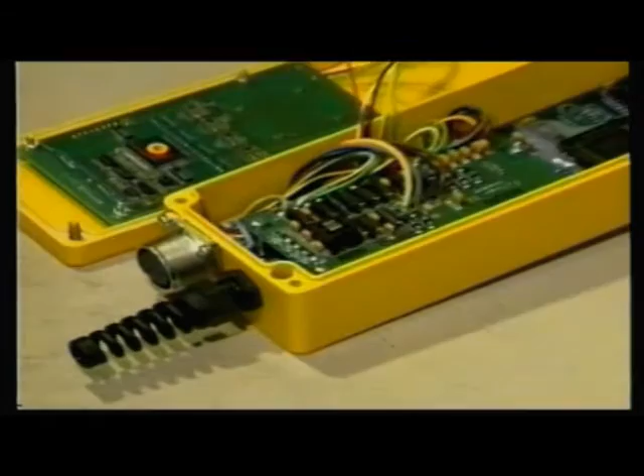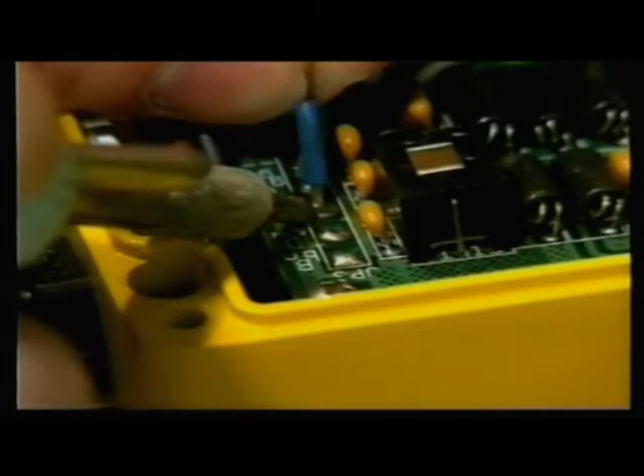Moba is a modern, innovative company with about 70 employees. Together with the subsidiaries in Dresden and Italy, Moba is a company offering high-performance mobile control, measuring and logistic systems.

The main activity of the company is directed to the following areas: machinery controls, weighing systems, ident systems, system software.

A competent customer advisor service has resulted in the development of intelligent products which are ideally suited to the market. This leads to a considerable increase in efficiency of the end product. Worldwide representation ensures optimal local support of our customers.

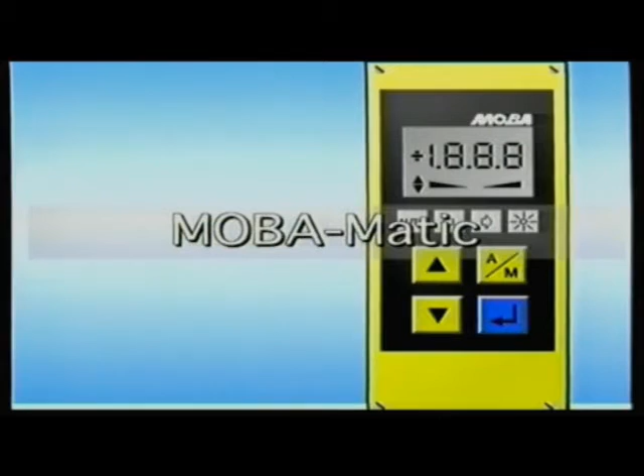In 1994, a revolutionary system for the leveling of the screed was developed, the Moba Matic. Due to its accuracy and its simple operation, the system became a great success within one year. Four different types of sensors are available for equipping the road paver.

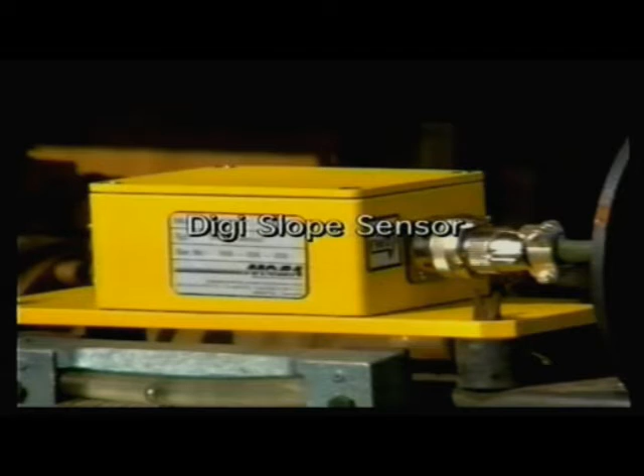The DigiSlope sensor for slope control. The DigiSlope sensor is equipped with an LSTA sensor unit, especially developed for the road paver. It enables slope control for even very wide screeds and was conceived in addition for high compaction screeds. Because of its reliability, the LSTA sensor unit has been used for the last 20 years in the well-known S276A slope controller, a proven technique.

The sonic ski sensor. For all applications, the sonic ski sensor employs contactless, ultrasonic techniques. The use of six ultrasonic sensors enables a sensing range of 25 centimeters above the string line. For ground sensing, the sonic ski calculates an average value and can therefore smooth out irregularities of curbs or gutters.

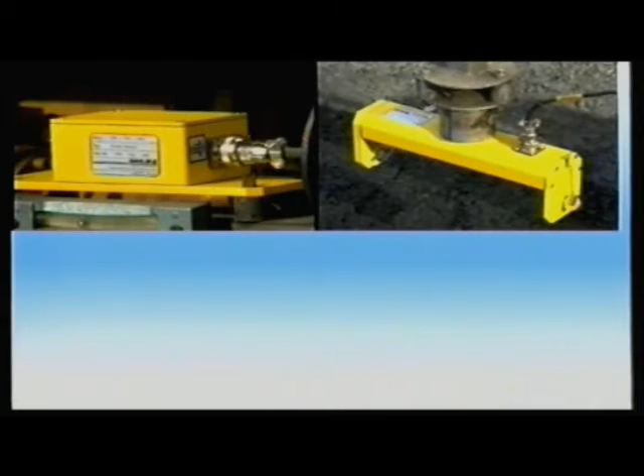The Digi-Rotary sensor for grade control. If the use of an ultrasonic sensor is not possible, the Digi-Rotary sensor is a good value for money alternative. The Digi-Rotary sensor works with the same principle as the proven grade controller G176B. As accessories, a sensing arm, a sensing tube, and a sensing ski are all supplied with the Digi-Rotary sensor.

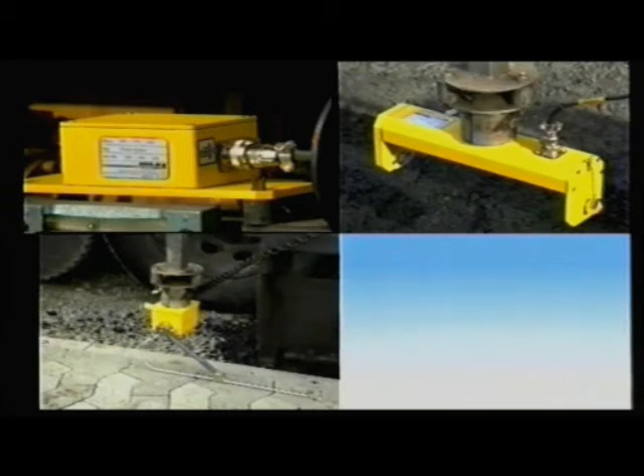The LT360 laser receiver for grade sensing. The LT360 is used everywhere where a rotating laser transmitter is employed as a reference. Laser transmitters are preferred for the constructions of airports and car parks.

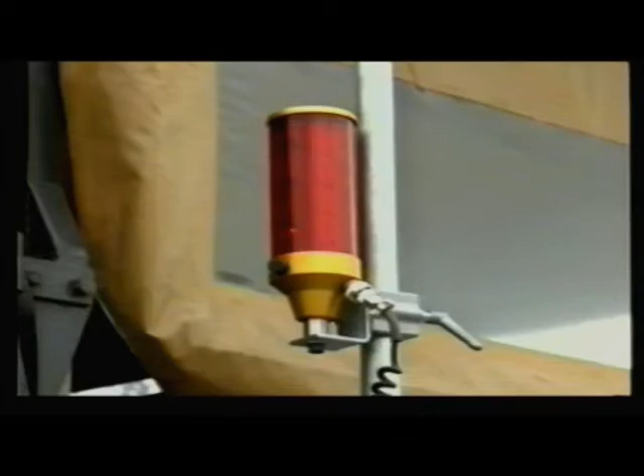The digital controller recognizes the sensor which is connected and is immediately ready for operation. The operation of the various sensors differs only very slightly and causes no problem to the user. The Moba Matic: for every application, the right sensor.

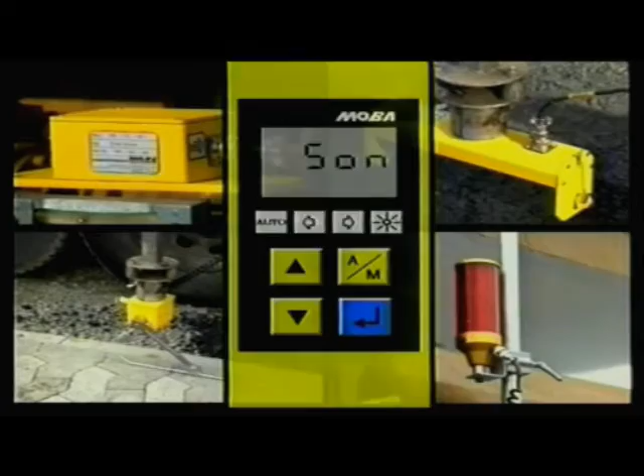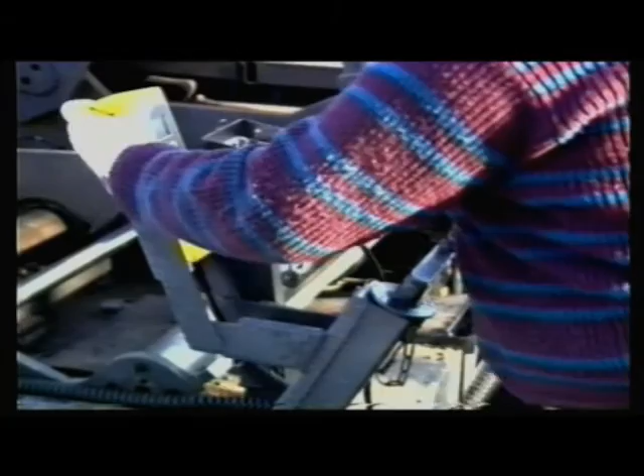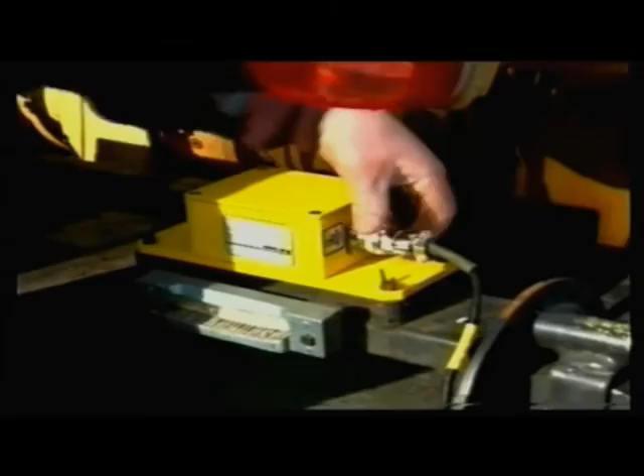The standard system is installed on the paver in a few easy steps. The digital controller is fitted into the standard holder. The cable of the digital controller is plugged into the machine connector. The Digi-Slope sensor is fitted into the standard holder and connected to the digital controller with a spiraled cable.

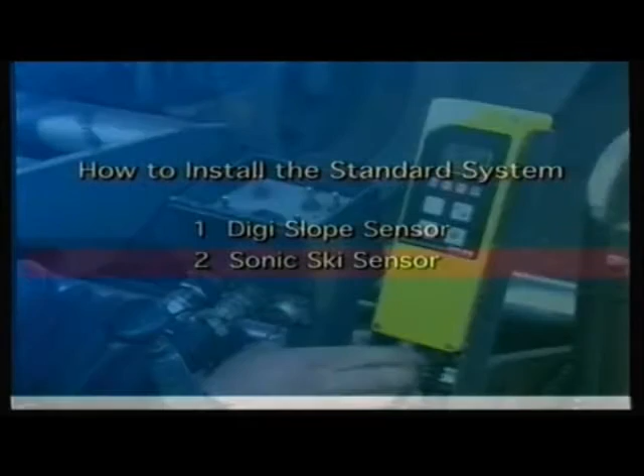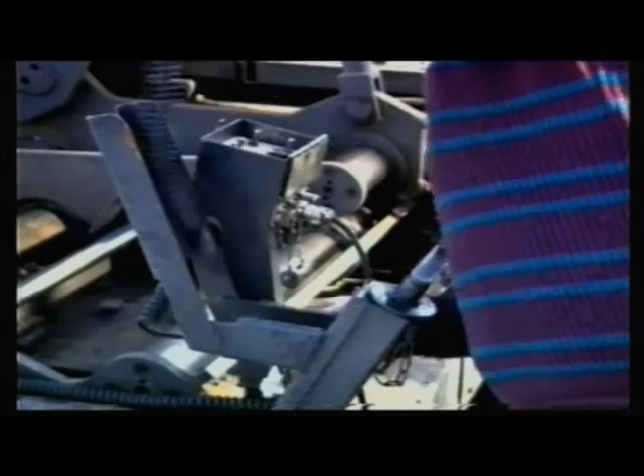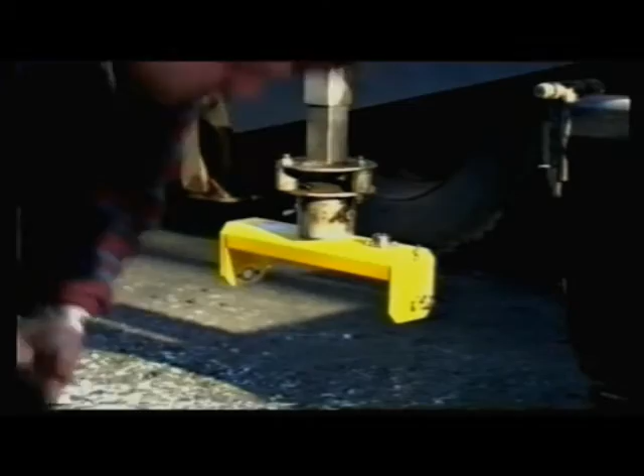To fit the sonic ski, the same procedure is followed. First, the controller is fitted into the holder. Now, as with the Digi-Slope sensor, the cable of the digital controller is connected into the machine connector. The ski is fitted into the standard holder and connected to the controller. Finished.

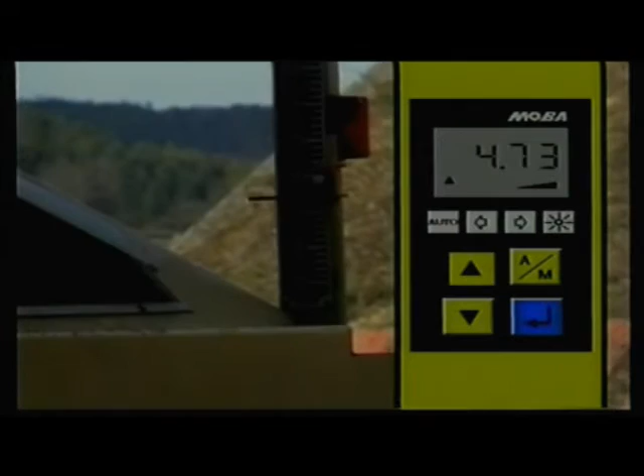If the sensor has been fitted for the first time, or if a sensor has been changed, the new sensor must be acknowledged by pressing any one of the keys. With the up or down key of the controller, the tow point is brought to the start position. To set the set point to be the same as the existing actual value, press the return key. The display shows the actual value again.

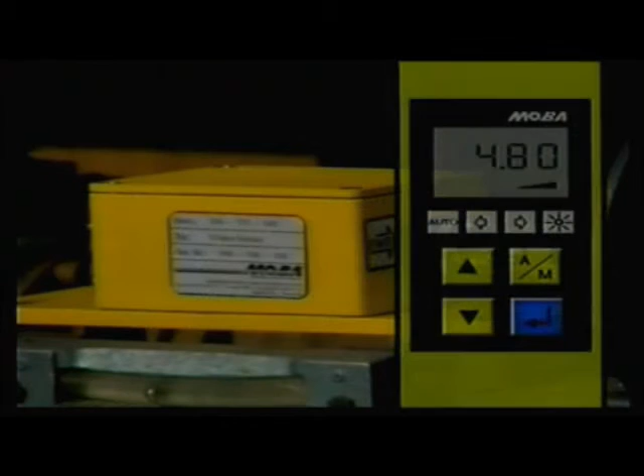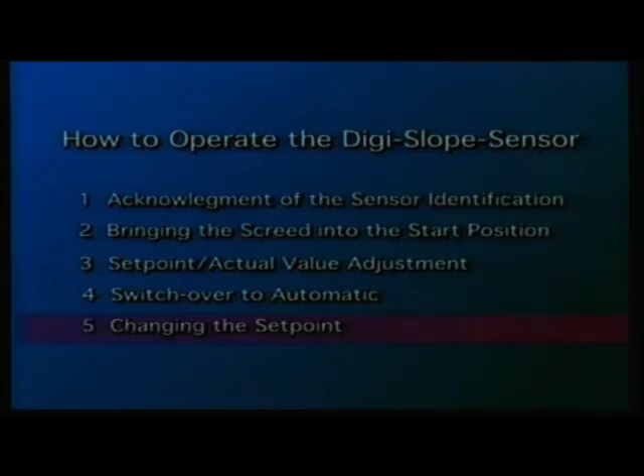By pressing the AM, or automatic manual key, the automatic control mechanism is activated. The controller now controls to the set point displayed. During operation, the set point can be changed by pressing the up or down keys. The controller immediately controls the actual value to the new set point.

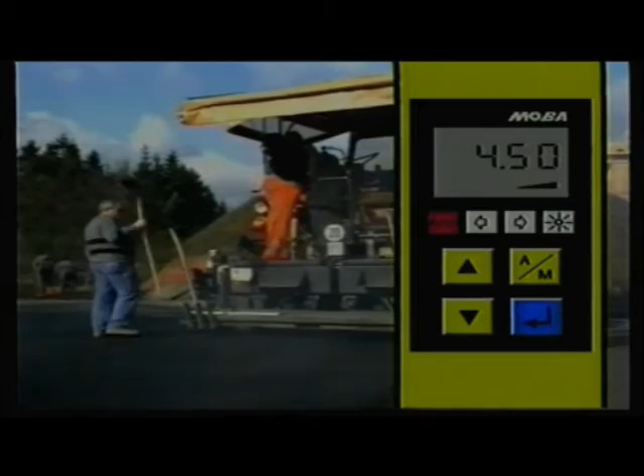If the sensor has been fitted for the first time, or if a sensor has been changed, the new sensor must be acknowledged by pressing any one of the keys. By simultaneously pressing both the up and down keys, the string line mode can be activated or deactivated. This example shows sensing of a string line. The illuminated string line lamp is a confirmation of the selection made. The tow points can be set to the start position by pressing the up or down keys of the controller.

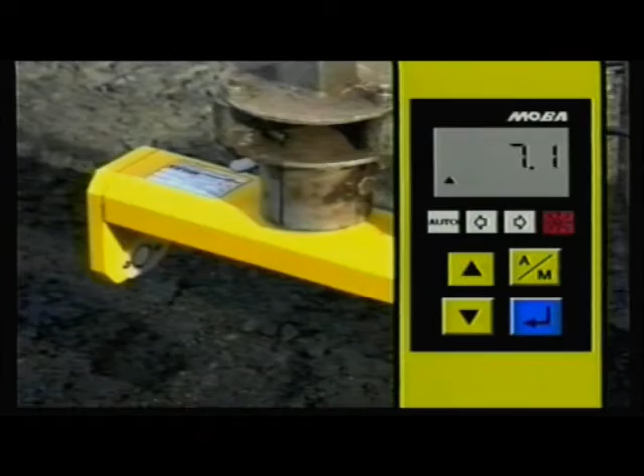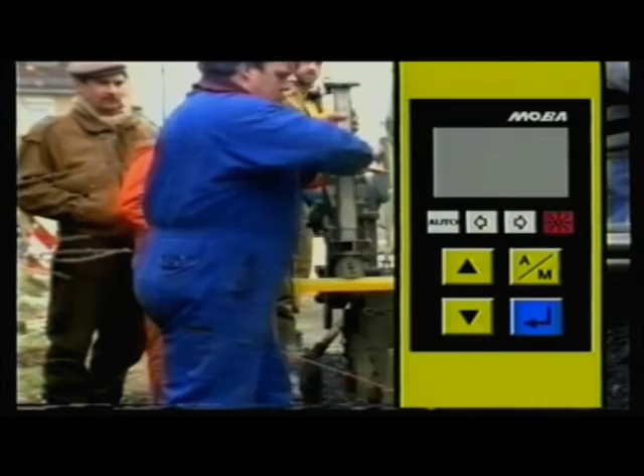For stringline sensing, the ski must be positioned at a height of about 350 mm crosswise above the string line. This is signified when the actual value display no longer flashes.

By pressing the return key after positioning the sonic ski, the actual value and set point are set to 0.

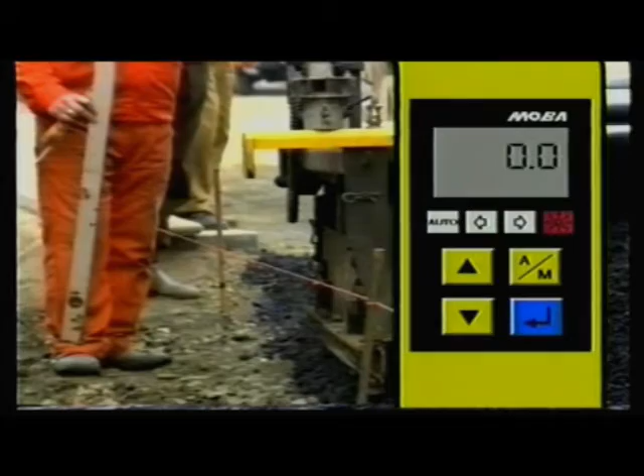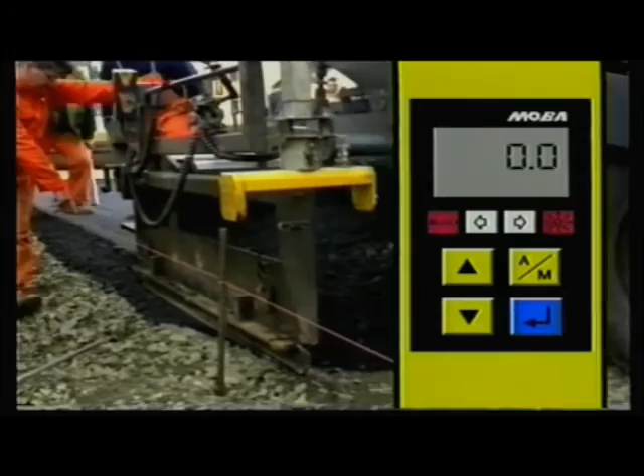After pressing the A/M key, the controller works automatically. The set distance between the sonic ski and the sensed reference is kept constant. During operation, the set point can be changed to the required value by pressing the up or down keys. The sonic ski immediately controls to the new distance set.

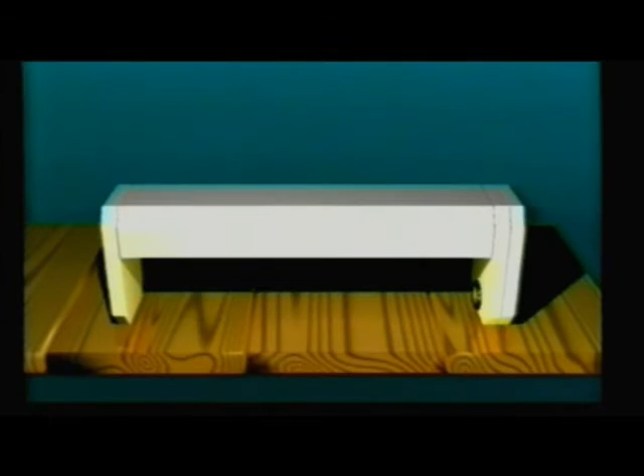Now it only needs to fit into the standard holder and work together with a digital controller. Add a nice color, and finished. Now that's what an ideal sensor should look like.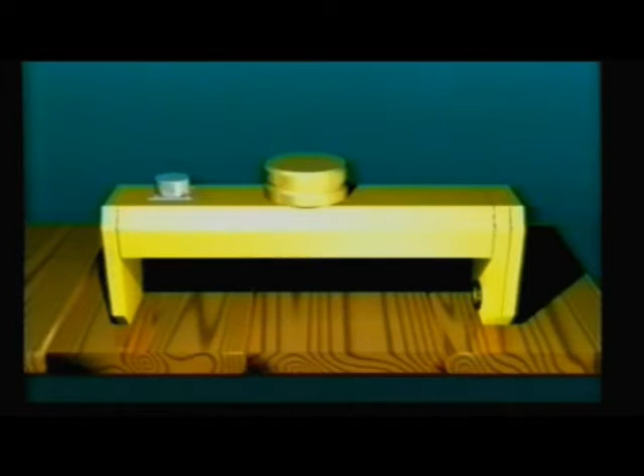How is distance actually measured with ultrasonics? It's simple. You need a sensor that can send and receive ultrasonic waves, a reference surface, and a stopwatch. The sensor sends the sonic waves in the direction of the reference surface and starts the stopwatch. The sensor is then switched over to receive. The sonic waves reflected back cause the stopwatch to stop when they are received.

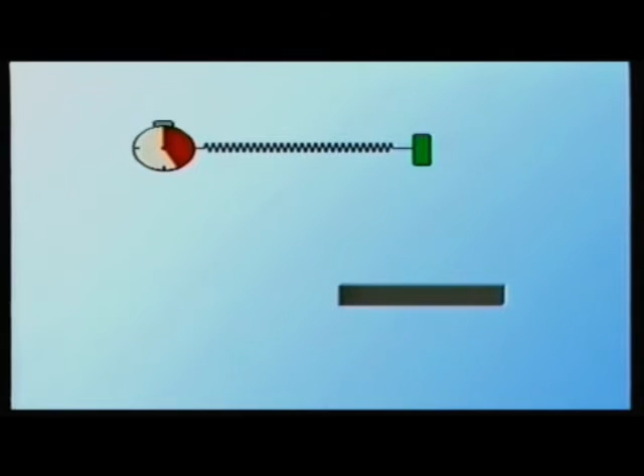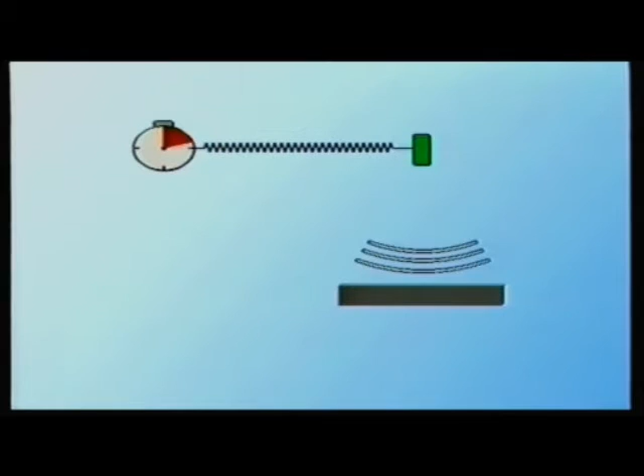Once again in slow motion. The sensor transmits sonic waves, and at the same time the clock is started. The sensor switches over to receive. The sonic waves are reflected, received by the sensor, and stop the clock. Because the speed of sonic waves is known, the time measured can be used to determine the distance between the sensor and the reference surface.

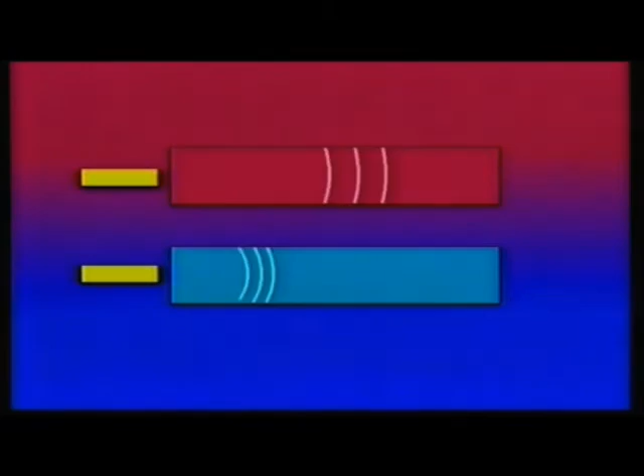But unfortunately, it's not quite that simple. Sonic waves do not always travel at the same speed. Their speed is dependent on air temperature. Sonic waves travel faster in warm air than in cold air.

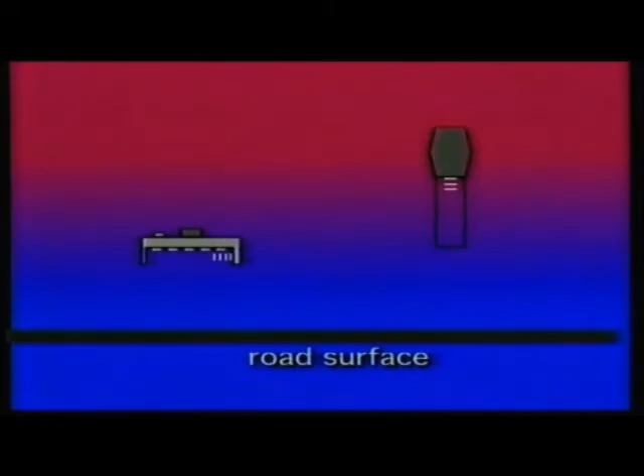By making a reference measurement in which the distance is known, a sonic speed reference can be established. Here, it must be noted that the reference measurement determines the air temperature of its own reference distance, not the temperatures outside this range. The greater the distance measured, the larger the measuring error is. For a distance twice as long, the measuring error will be twice as large.

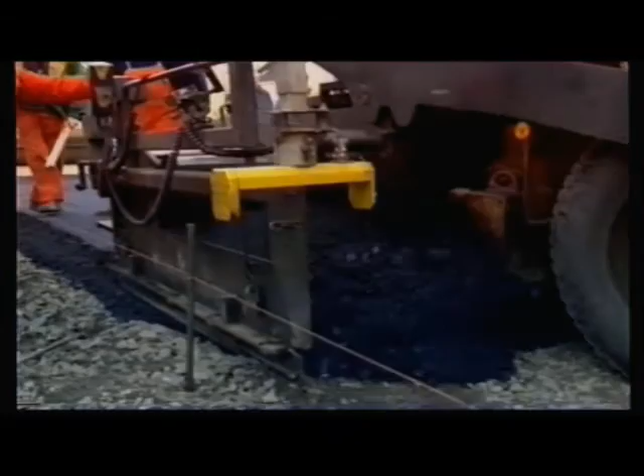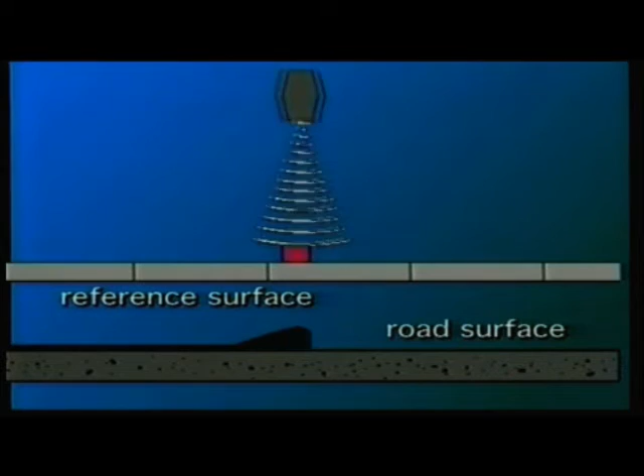And concerning errors, what happens when, during stringline sensing, the ultrasonic sensor does not detect the stringline, or when ground sensing, large stones hinder measuring? To eliminate such errors, Moba has integrated a control window for the sonic ski which, as standard, is set to plus or minus 3 centimeters. This value can of course be altered according to circumstances.

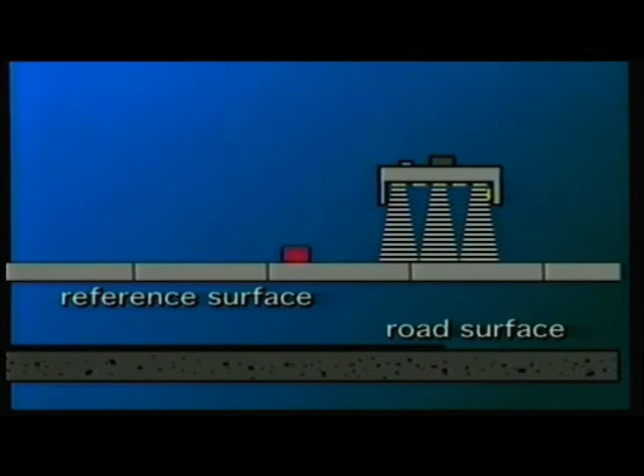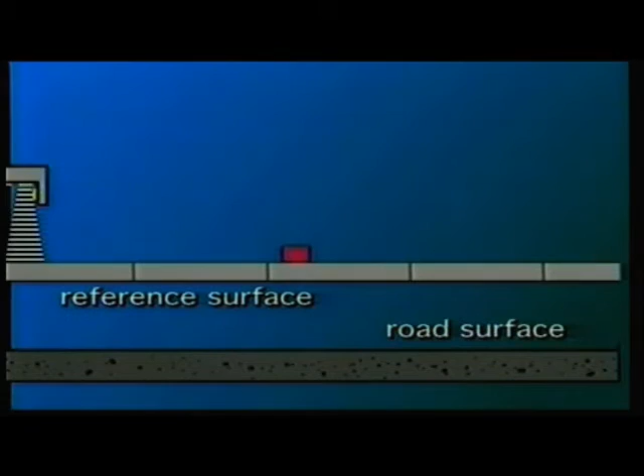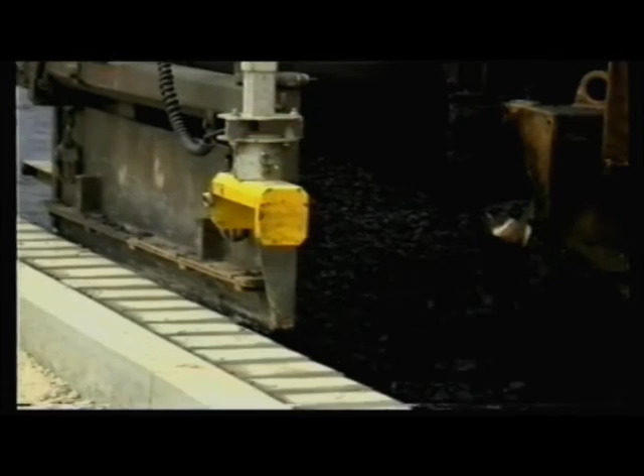The control window works as follows. Obstructions which are larger than the control window are ignored, and the controller stores the last value. If the control window has been set too small, there may be complications with large changes of reference, for example on steep slopes. The control window itself is not designed to compensate for irregularities of the reference.

This is done automatically by the sonic ski taking an average value. Systems that work with only one ultrasonic sensor light up an area of about 25 centimeters. The reflected sonic waves first detected are taken as a true measurement of the distance. Unevenness of the reference is simply copied without correction.

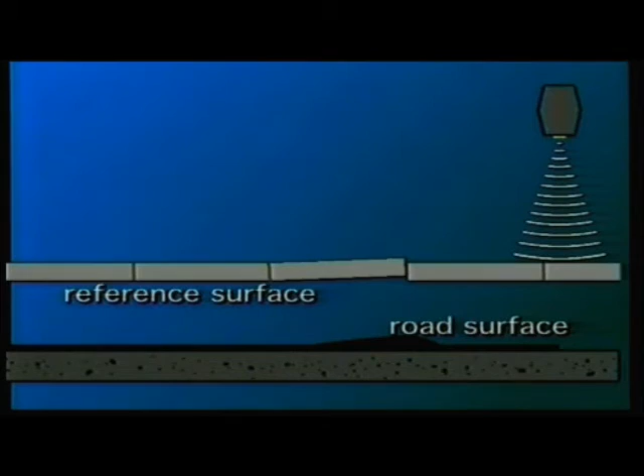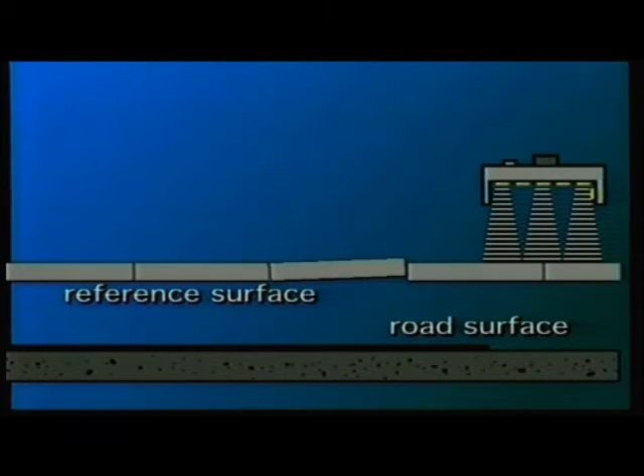For ground sensing, the sonic ski works with 3 ultrasonic sensors. From the resulting 3 independent measurements, an average value is constantly taken. In this way, irregularities in the course of the curb or the gutter are compensated for. Not quite - when detecting with a magnifying glass, one can detect small errors, but the ski is still 3 times more efficient than a single sensor.

Ultrasonic waves spread out in the same way as a cone of light. Sensors which work with only one ultrasonic sensor must be positioned about 60 centimeters from the string line. Only then, and very inaccurately, can a sensing width of 25 centimeters be achieved. It's not always possible for the driver of the paver to keep the 1-unit sensor directly over the string line.

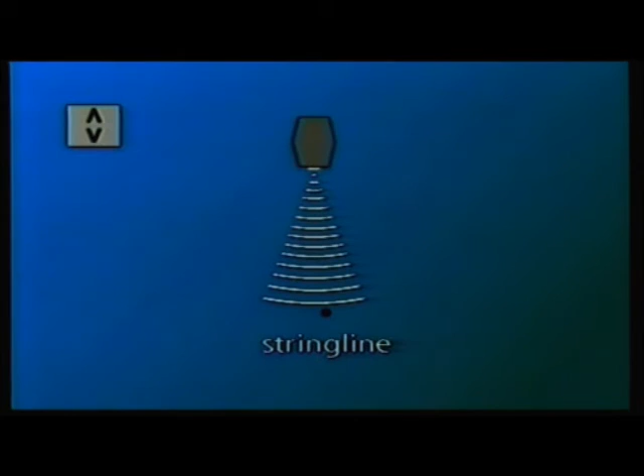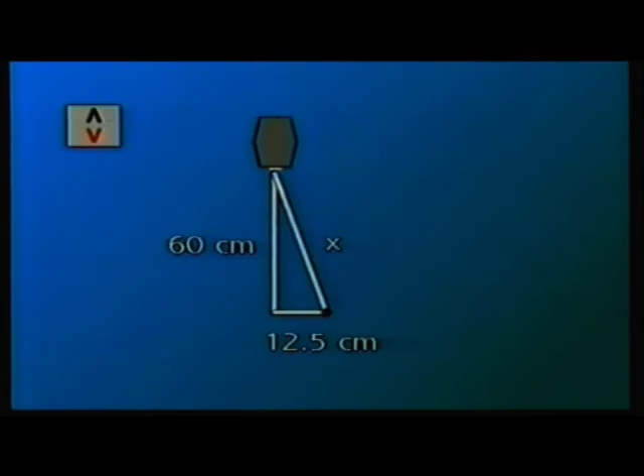A 25 centimeter sensing width can result in a possible deviation of 12.5 centimeters. For a deviation of only 12.5 centimeters from the vertical, there is a measuring error, according to Pythagoras, of more than 1 centimeter.

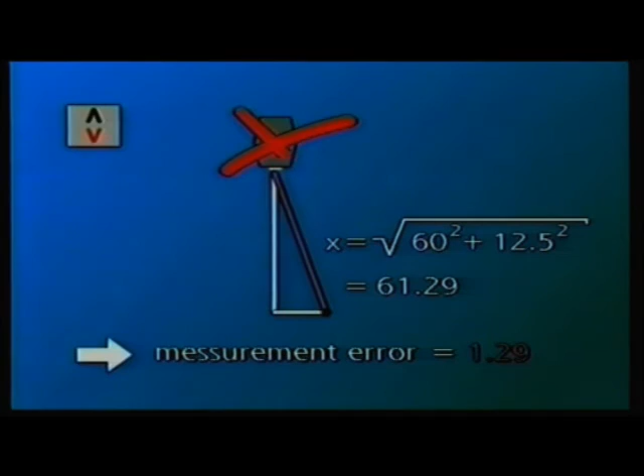Therefore, the sonic ski from Moba is fitted with 5 sensors. For stringline sensing, only one sensor is evaluated, the one with the shortest distance to the string line. Thus, an accuracy of plus or minus 2 millimeters can be achieved.

It's not a trick, it's a sonic.